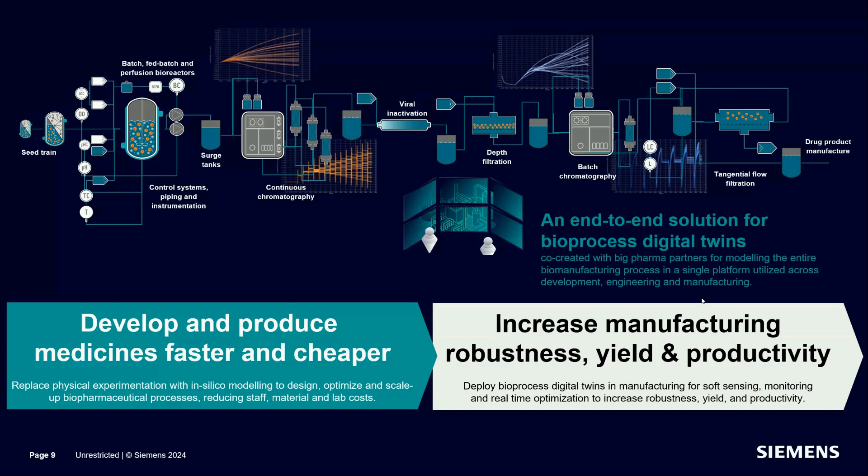Oh, I think we have a little bit of noise in the background. Maybe that's you, Angela. Just before we jump into the first poll.

So the term digital process twin is often used quite loosely. So I think it's useful to define a few categories that depend on the degree to which data flows from the physical object to the digital object. And so we have these three categories: digital model, digital shadow, and digital twin. With a digital model, the data flow is manual. With digital shadows, the data flows from the physical to the digital automatically, but the digital to the physical is still manual. And then we have the full digital twin where the data flow is completely automated.

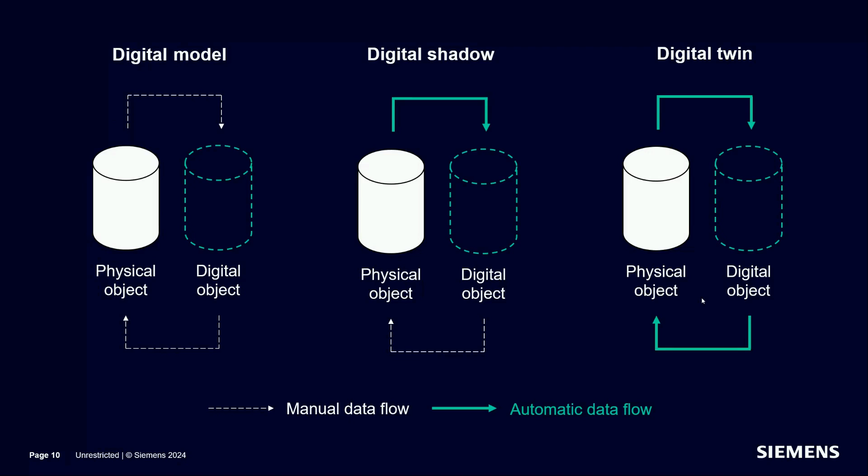So what we tend to see in general is that in R&D and engineering, organizations are predominantly utilizing digital models and digital shadows. And then in manufacturing, it's more aligned with digital shadows and digital twins. However, there are certainly outliers. For example, there are definitely cases where digital models are used by manufacturing to analyze deviations. And certainly I've had conversations where there's interest, at least, in utilizing digital twins for automated process development, where we have a back and forth between the experimental system and the digital twin, which is guiding the actual experiments that are performed.

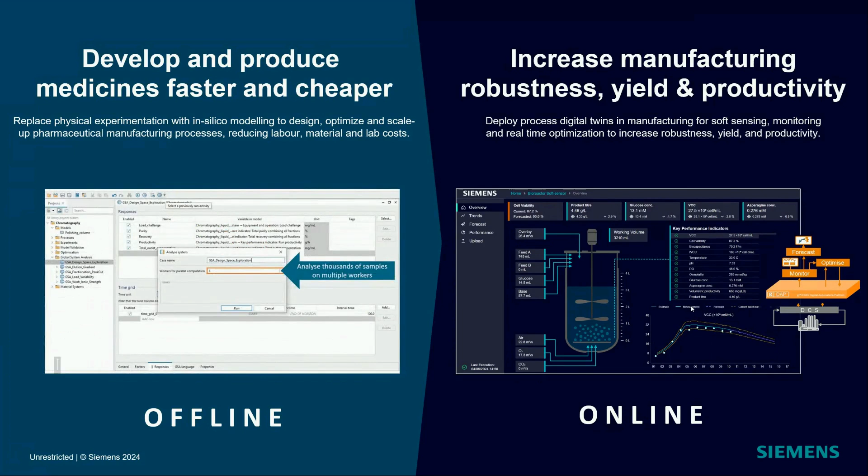Okay, so here at Siemens, we have customers that are utilizing digital process twins in bioprocessing, both offline and online. And so we have examples of digital models, digital shadows, and digital twins. So what we're going to do now is have a look at a number of examples. And the first thing we're going to look at is offline usage. And this tends to be where organizations start their digital twin journey.

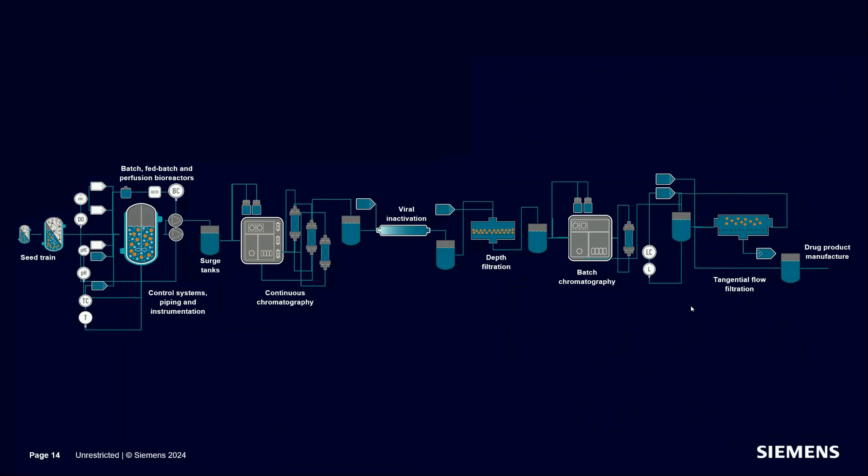Okay. So let's consider a bioprocess. Here we have a continuous monoclonal antibody manufacturing process. But what I'm going to describe in the next few slides is equally applicable to batch processes, and it also applies to the range of modalities that we usually see across the industry, such as vaccines, other therapeutic proteins, gene therapies, mRNA, et cetera. So when we design these processes, unit operations are usually considered discretely, and this means they each receive their own set of control elements and acceptable ranges, which are then assembled together to provide an overall control strategy for the entire process.

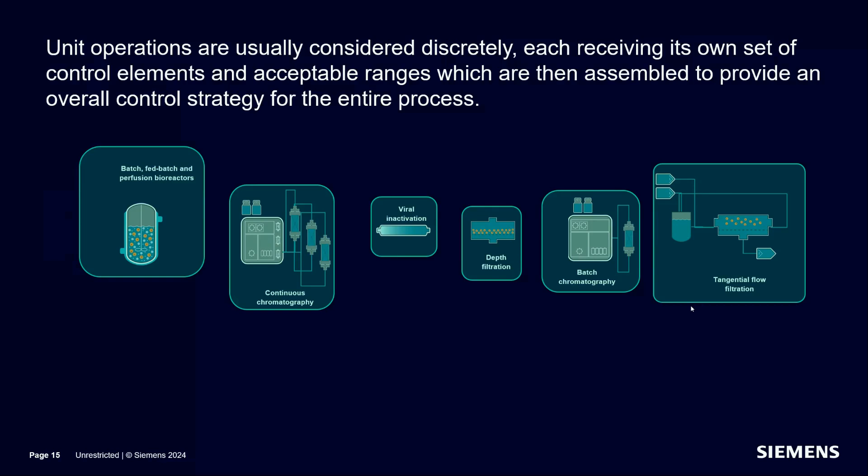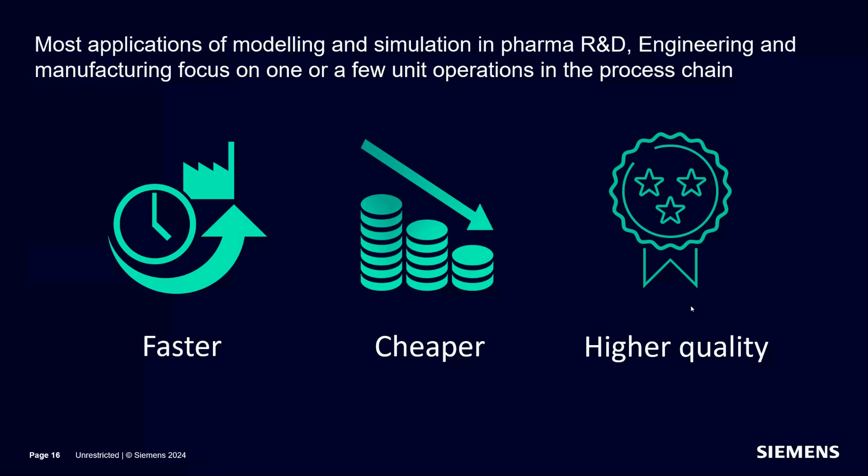And I think historically, or at least over the last decade, a lot of the applications where we see science-based mechanistic models, at least in biopharma R&D, engineering, manufacturing, tend to focus on a single unit operation in the process chain at a time. And here, when we discuss this with our customers, we're always discussing the advantages over a purely experimental approach. So being able to perform development tasks faster, cheaper, and with greater process understanding or fundamental understanding.

Now, optimizing this process experimentally required over 3 months and a significantly large experimental effort using a kind of traditional DOE approach. Now, in this project, a mechanistic chromatography model was calibrated using data from 3 gradient elution experiments. So these were linear gradients, and samples were taken every 1 column volume during the elution. And the concentration of each of the main species that we wanted to model was determined using HPLC.

So this data was imported into the software and used to calibrate the adsorption isotherm part of the model. So in this particular case, we're using a rate model of chromatography. And the calibrated model was then used to explore the design space. And what we found was that the model was able to identify the optimal gradient in about a week. This was confirmed experimentally. Fascinatingly, the optimized gradient that the model produced was very similar to the experimental approach.

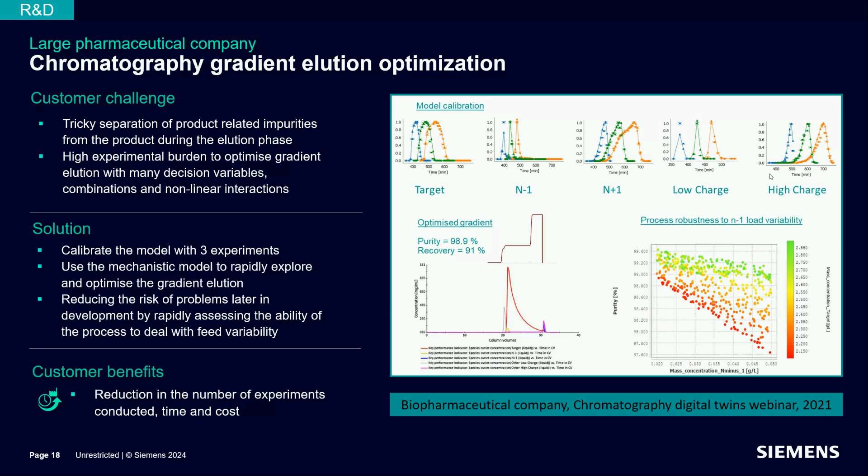But of course, it was able to identify that using significantly less material with only 3 experiments and in a much quicker time. So by introducing mechanistic modeling into development workflows, we're able to significantly reduce the number of experiments that we need to conduct, the time and the cost.

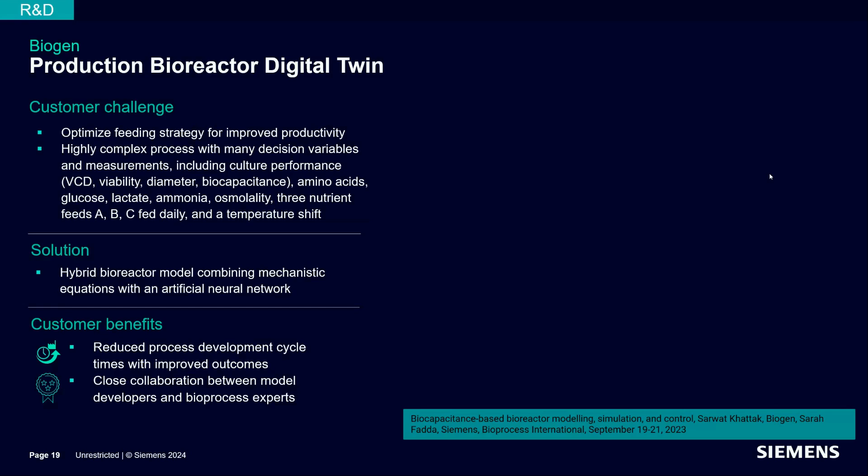Okay, so the second example is the optimization of the feeding strategy of a production bioreactor that produces monoclonal antibody. So this is a highly complex process, of course. There's lots of decision variables. In this particular case, there were 3 nutrient feeds that were fed daily and a temperature shift. So in this work, we start by configuring a mechanistic bioreactor model.

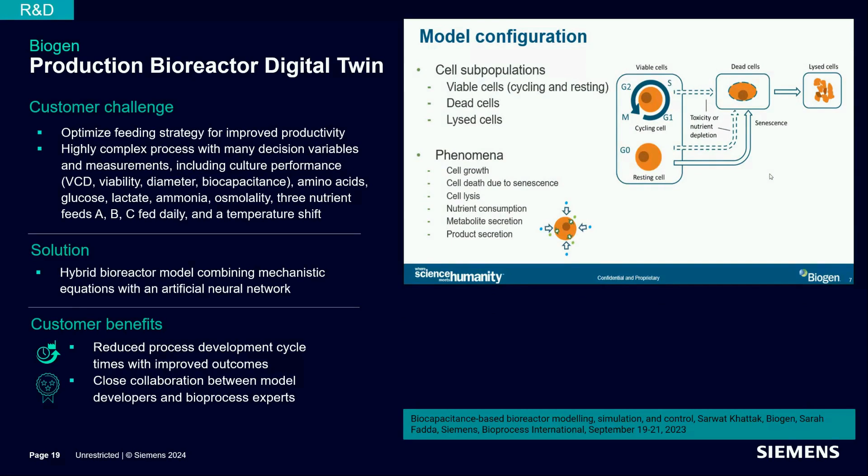And this includes a segregated cell population model where we're tracking multiple populations of cells. So we have viable cycling, viable resting, dead cells, and lysed cells. And then we also have phenomena models to model the cell growth, the cell death, the cell lysis, the consumption of nutrients, the secretion of metabolites, and of course the production of the product of interest.

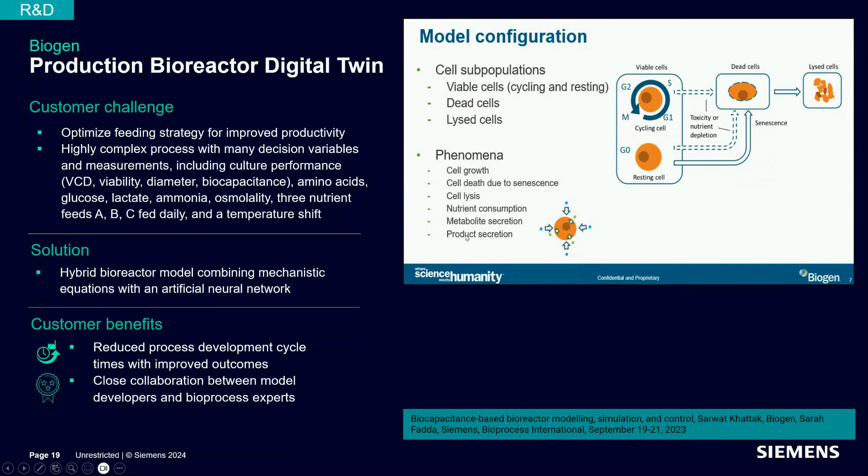So for the majority of the experiments, we saw very good predictions. But in this case, we identified in the analysis of the model validation that the model was struggling with high seeding densities and with the impact of temperature on cell culture kinetics. And in this case, the data which we collected for the model calibration was something that had been previously generated for a DOE. And so this wasn't data that was designed specifically for model calibration. So it's important to be aware of this.

So for these phenomena, we explored a number of options. So the first thing that we explore is can we extend the mechanistic model, introduce some additional equations that would be able to describe that phenomenon. But in this case, we decided that actually this was part of the process that we didn't have enough fundamental understanding on, and so we moved to a hybrid modeling approach.

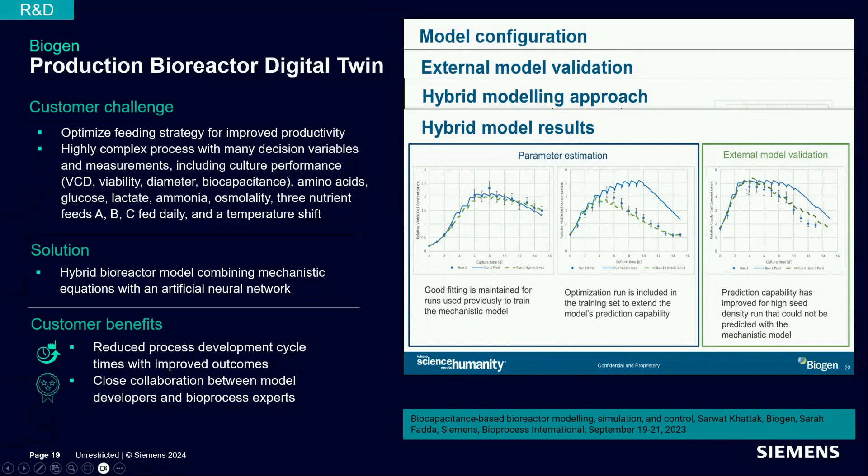On the right-hand side, you see though the external model validation or the blind testing, and you can see here that we found that the prediction capability has improved greatly for a high seed density run that could not be predicted previously.

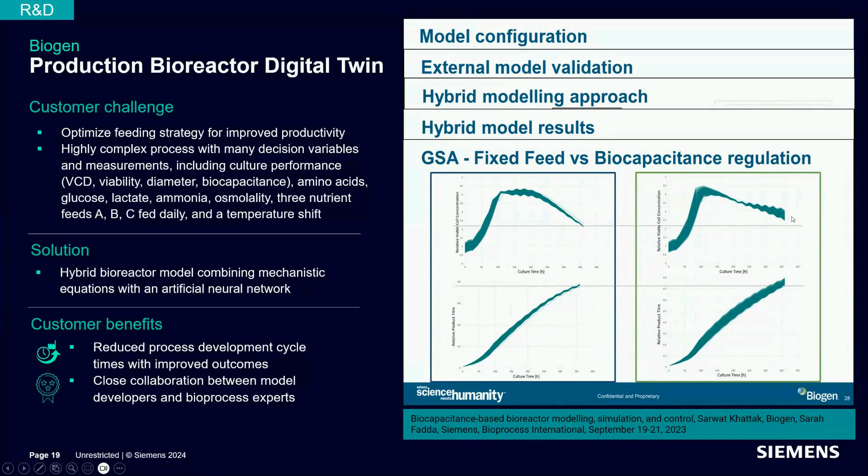Then the validated model was used to explore the optimal feed strategy, and in particular in this case, we also considered the usual variability that we would expect to see in this bioreactor. So rather than a point prediction where we look at one input and then we predict the outcome, instead we use the expected variability in the inputs, and we predict how that process will operate across that range of inputs. And you can see here that the model predicted that the biocapacitance feed strategy was something that would be more robust and have a better performance than the fixed feed. And this was also confirmed experimentally.

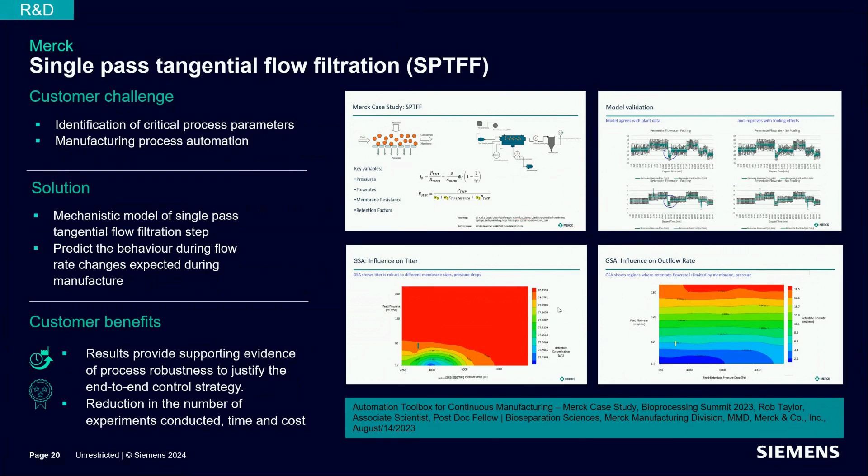Okay, the last example for this part of the presentation is a single pass tangential flow filtration. And here a mechanistic model was calibrated, and then it was used to predict the behavior of this process during flow rate changes expected during manufacturing. So on the top right-hand side, we can see that the model was able to match the experimental values very well. And then the two contour plots on the bottom here show another very useful application of modeling during development, which is to explore the design space. So these were design space studies that were used to provide supporting evidence of process robustness. And we're going to come back later to this particular case study.

So you may ask, well, how did you do that? How is this all done? So the models that we're using here are all based upon known science and engineering principles to predict the CQAs from the CPPs that influence them. And I think that the real difference to point out is that whereas a data-driven model or a statistical model may have tens of equations, these mechanistic and hybrid models, which we're using, typically have tens of thousands of equations. So they tend to come with a huge amount of knowledge built into the structure of the equations. But of course, they're correspondingly more complex to build.

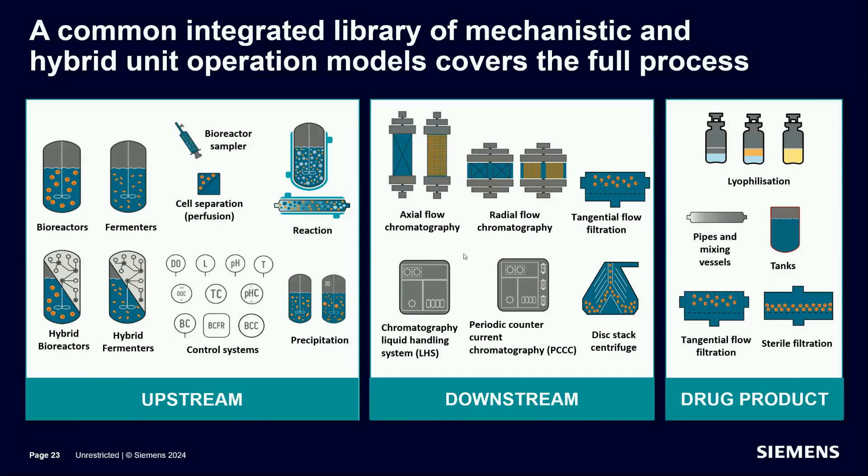Now that's where Siemens comes in. So what we've done is we've implemented an established library of integrated mechanistic and hybrid mathematical models of all the different unit operations that you would usually expect to see in bioprocessing. So that's the equipment and the different phenomena. And this has been based upon the very best published science available. And we established this through our opinions, but also the opinions of leading academics and of our partners and customers. So for all of these models, the equations are derived from the natural laws of physics, chemistry, and biology. So they contain really deep mathematical knowledge of the process, which significantly reduces the data requirements. If you think about it, what you're doing here is you're leveraging many people's research into how processes actually work.

So with these models, the parameters of the models tend to have a physical meaning, as opposed to a data-driven model where the parameters often can't be directly attributed to something going on in the process. So a model parameter for chromatography might be the capacity of the resin. Then the other thing which is quite different is that these equations are typically differential equations, or based upon differential equations. And so what we're doing here is we're predicting and simulating the process dynamics. And this is quite different to statistical models, which are often simply an input-output correlation.

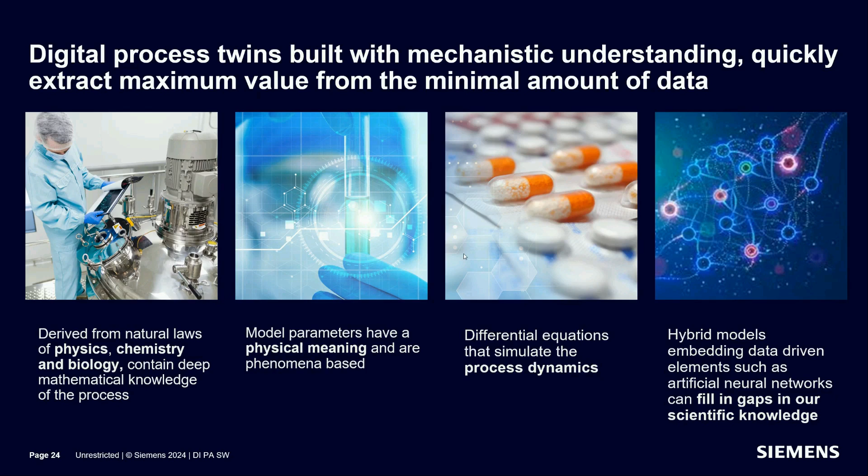Now, where there are gaps in our scientific knowledge, which often occurs with bioprocesses, this means that sometimes we can't derive mechanistic equations or first principle equations for the entire unit operation or bioprocess. And this is where we've seen that big advancement recently with the creation of this hybrid modeling approach, where we embed data-driven elements such as artificial neural networks to fill in the gaps in our knowledge. And we do this in a way that preserves as much as possible the benefits of the mechanistic model. So we really try to use mechanistic equations as much as possible, and then only bring in the data-driven part to cover the gaps in our knowledge.